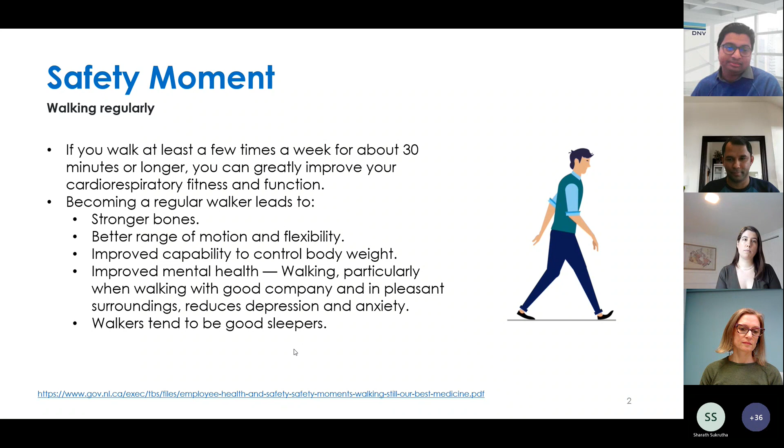Now, the Young Professional Committee is a brand new committee established late last year with a focus to bring together all the young professionals of our community in an organized forum. By young professionals, we mean those like many of us who have less than 10 years of experience. Our vision is simple: building the next generation of geotechnical leaders. Based on the vision, our mission is supported by 5 pillars: network, knowledge, development, collaboration, and impact.

The committee will provide a network for our peers and veterans, create avenues for building geotechnical knowledge, provide access to both personal and professional development, create opportunities through collaboration with industry, academia, government, and other young professional groups outside CGS, and create an impact by articulating a vision for the future within the changing industry landscape.

As you can see, we have a diverse leadership team representing young professionals from industry and academia, including both professors and students. 77% are from industry and 23% from university, both men and women, with 55% women. And almost all provinces in Canada: right now we have representatives from 8 out of the 10 provinces.

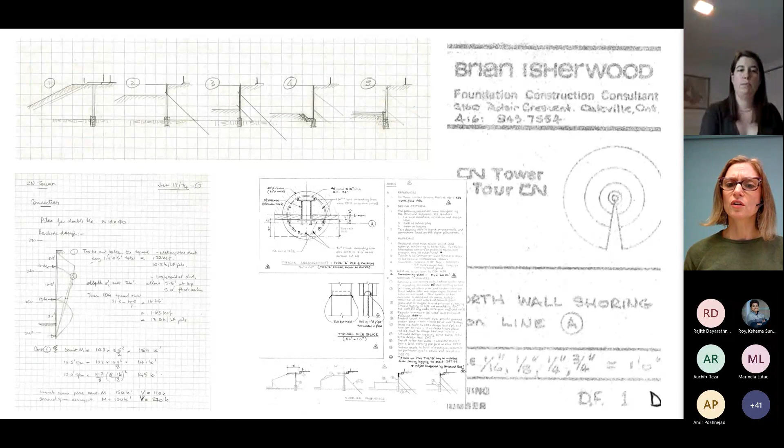Brian was very knowledgeable and an experienced engineer, and worked closely with contractors. You can see the care he would take to think through the process of the work, and in the middle there you can see the final product: detailed notes and details of how the pile and the caisson were going to be constructed.

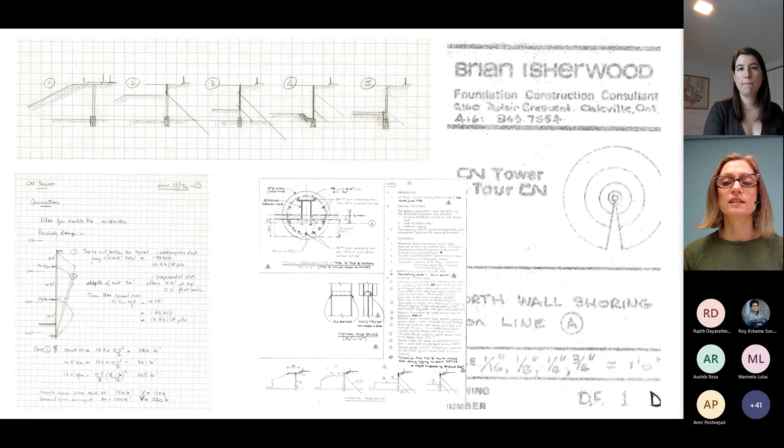So I think this gives us a good idea of some larger concepts that we're going to touch on as we go through the rest of the presentation today.

I wanted to give a little context on the different types of earth retention systems. The Canadian Foundation Engineering Manual has one chapter for rigid earth retention systems, like the gravity wall and bridge abutment wall examples on the left, and another chapter focused on flexible earth retention systems, like cantilever and tieback wall examples on the right. The difference, in simple terms, is that rigid systems move all in one, versus flexible systems deform as soil and water pressures are added to them.

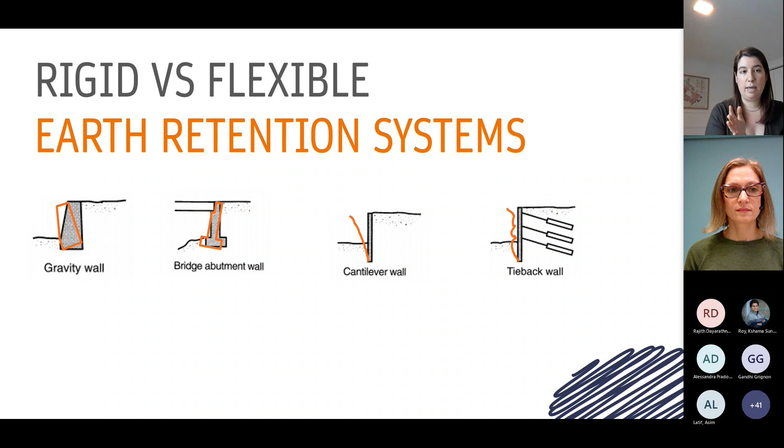At Isherwood, we specialize typically in temporary earth retention structures, which tend to be flexible systems, so that's going to be the focus of today's presentation. There's definitely lots that carries between the two systems, but we want to keep our focus a bit narrow so we can give you some good things to pull away and good understanding on one side, though you can definitely apply a lot of this to both types of retaining systems.

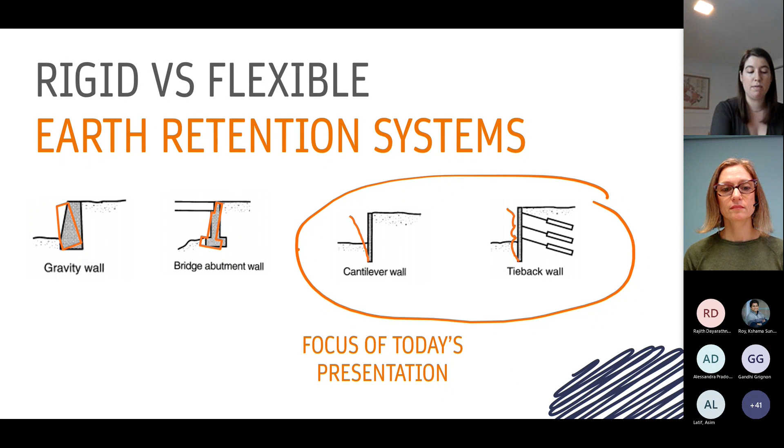So to start with, we'll just talk about why we really are doing this. Why do we need soil retaining structures? So this is just a little video.

I don't know if you're going to get the sound or not on your end. No sound, Erika? That's fine. Yeah, there was no sound. Okay.

So they said that if a 6-foot deep trench collapses, that could be 10 tons of soil. So even for something many of us might think is a fairly shallow excavation, like 6 foot deep, about the height of a tall person, it can put 10 tons of lateral pressure on you. So that's why, even for smaller excavations, retaining the sides of them is very important.

And then we have another video from one of our sites out in Vancouver, close to the coast, and water pressure is another big driver. I'm guessing you can't hear the sound here either, but you can see this is a tieback anchor, a soil anchor being drilled through a shoring wall, through a retaining wall.

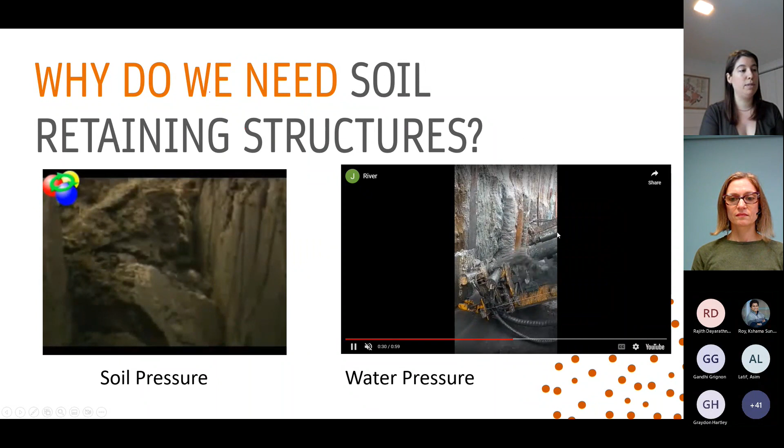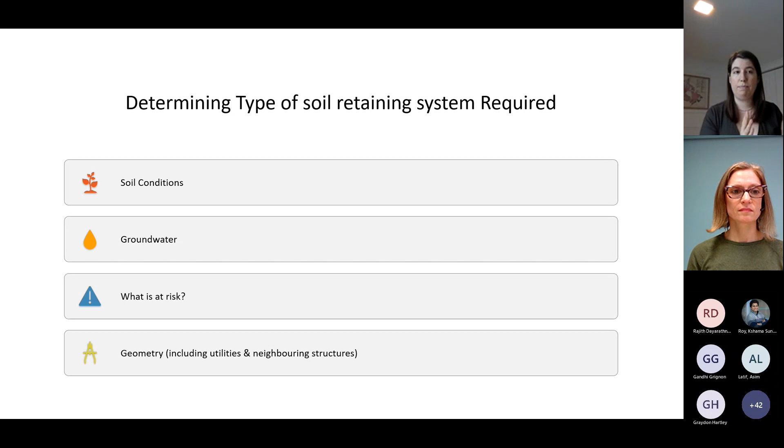So I mentioned soil conditions and groundwater are two of the things we're considering when designing a retaining wall system. You also should be thinking about what's at risk, which I have a slide next to show, and also the geometry, like where are the utilities, where are the neighboring structures, how deep of an excavation you need to build, or how deep of an opening you need.

So you definitely need to consider the risk when you're designing the retaining wall systems.

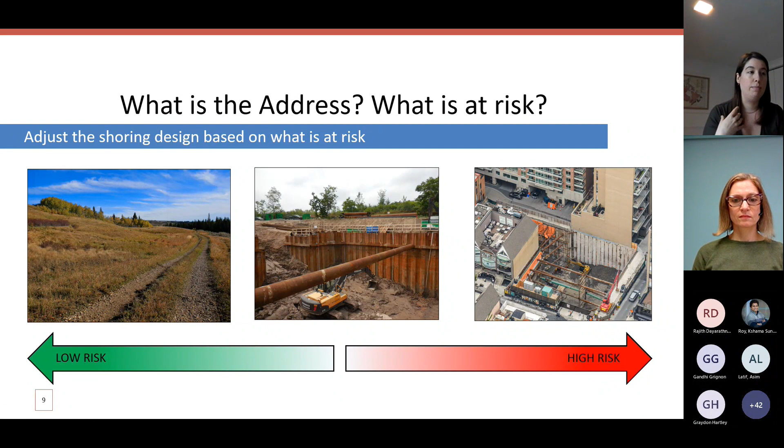I'll jump in here to give an overview of the typical elements of a temporary support of excavation design, starting with the inputs. I can't stress the importance of this enough—determining what parameters one's going to use, and all the information we have to be aware of in order to start the design. We'll touch on this in some future slides.

Step 2 will determine our lateral pressures. Here there's some judgment in terms of the distribution that we would use. I'll touch on that a little bit later.

Then, knowing the industry and what type of equipment and materials contractors are likely to use, we'll make some judgment about what pile size to select.

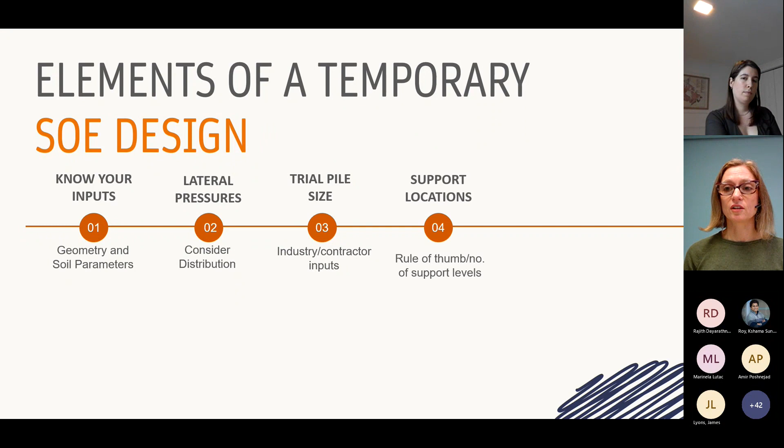Consider what level and how many rows of supports we're going to require and where to place those. We'll develop a simple model to determine things like pile moments that we'll use to design the pile for strength.

Then we'll consider the capacity of supports that we would need—again revisiting how we're going to distribute the loads, and where we can develop capacity, depending on different factors like soil conditions and which layers are stronger and better to develop an anchorage in.

Once we've determined, say, that we're using preloaded tiebacks, we've now introduced some vertical loads into the system, and we have to revisit the pile size and consider the axial forces combined with the bending moment. So we would do that refinement.

Now we're going to check our toe and ensure that we have sufficient penetration to get the reaction force that we require at the base of the system.

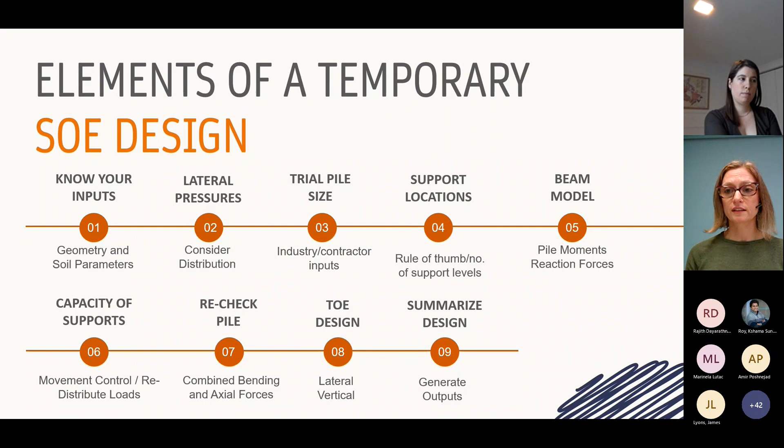And then finally, we'll summarize our design that we're going to take forward and incorporate into the drawings that express the design and are used on site to build the system.

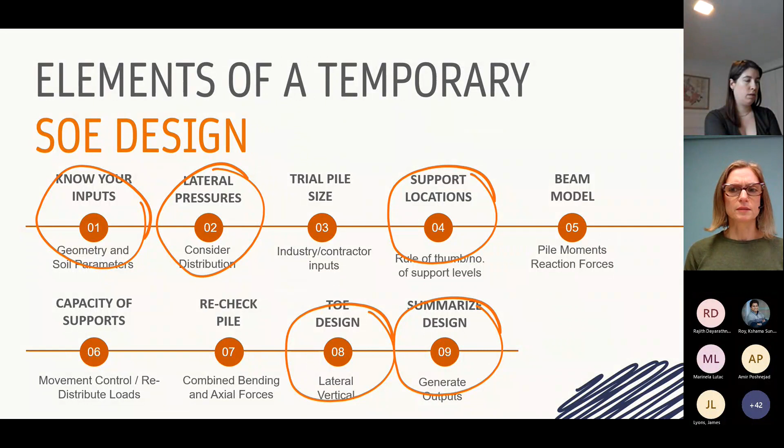So today we're going to focus on the 5 circled areas, as we won't really have time to get into the details of everything.

Okay, before we get into the design steps of how to approach a problem, we're just going to go through some examples of the type of systems that we tend to design, so you can get a feel for the wide range you might be looking at, the different applications, and that sort of thing.

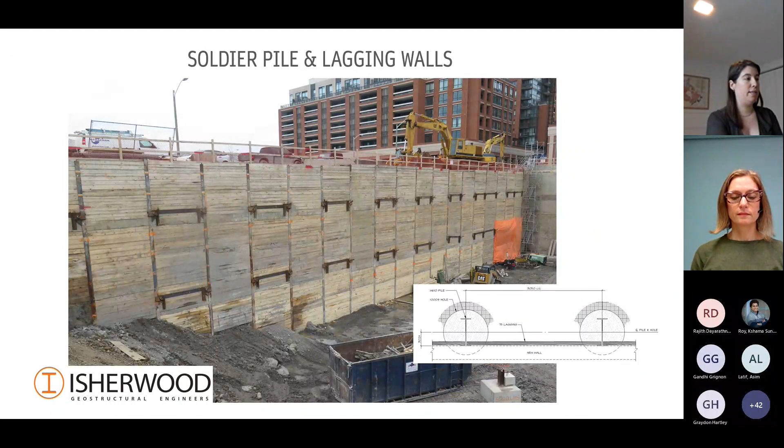So this is a soldier pile and lagging wall, which is drilled piles or driven piles with timber lagging in between the bays to support the soil. In this case, it's supported by tieback anchors, which you can see the heads of on the wall, extending into the soil behind the wall.

Here's another example, another soldier pile and lagging example, except it's 8 levels underground. This is the Shangri-La Hotel, I believe, in downtown Toronto. Once we hit the bedrock in Toronto, we just exposed the bedrock instead of lagging all the way down, because the rock is fairly self-supporting.

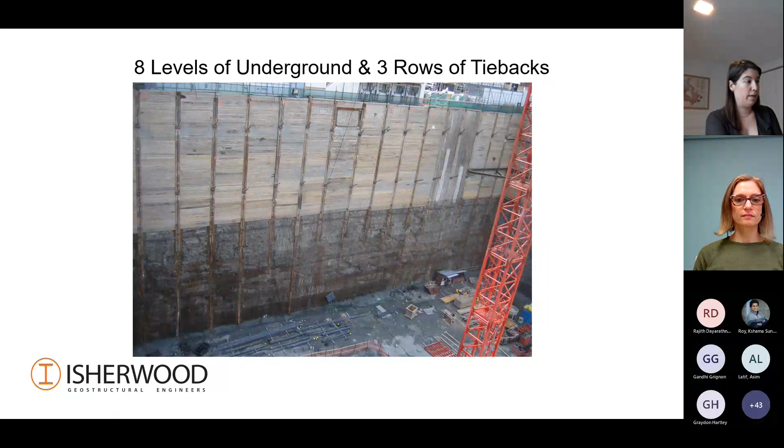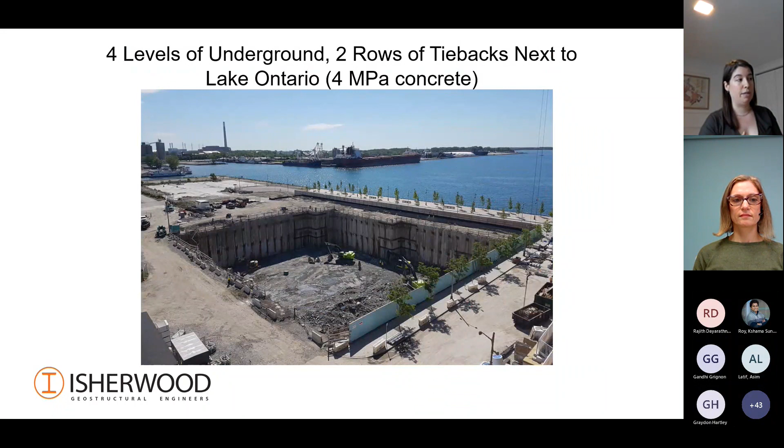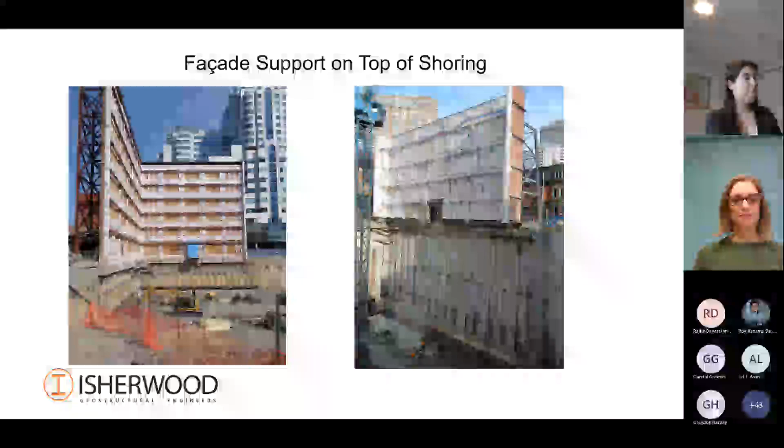Shoring is also frequently used to support—at least in Toronto—historical buildings where they need to keep the facades. We use it to support the facade system as well. So this is an example: you can see soldier pile lagging shoring below one, and a caisson wall shoring below the other example on the right, and then the historical facade is held up in the air, sitting on the piles.

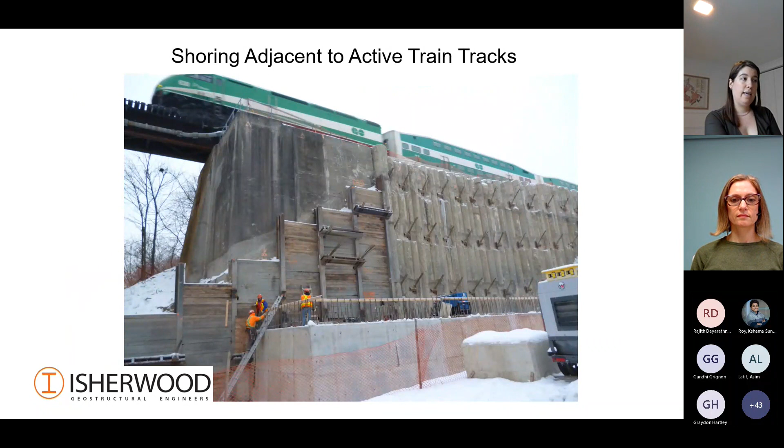And another example with soldier pile and lagging and secant wall shoring next to active train tracks.

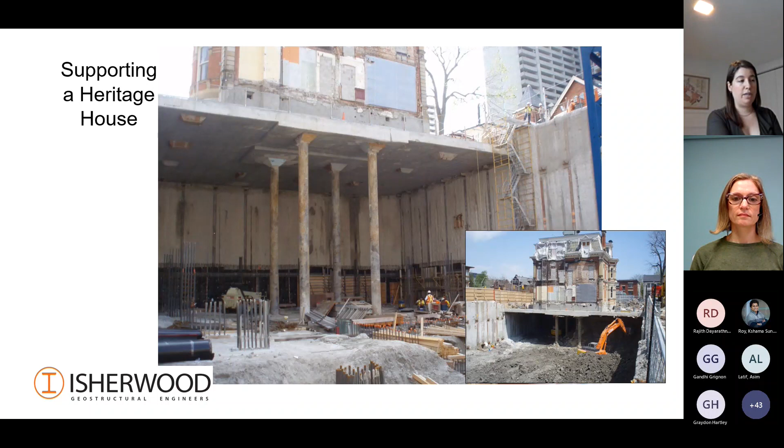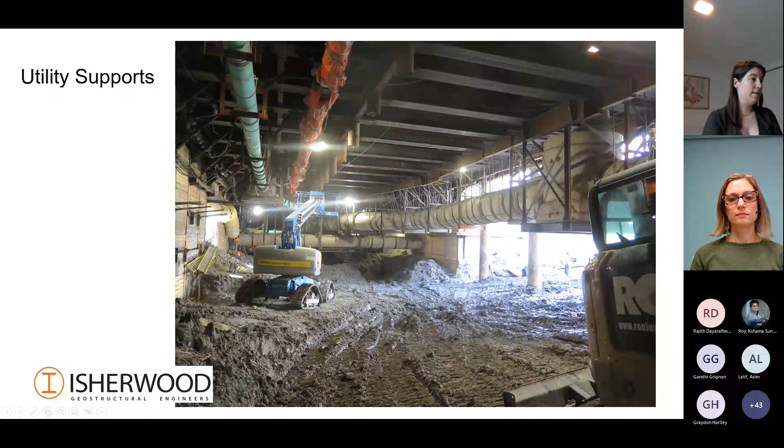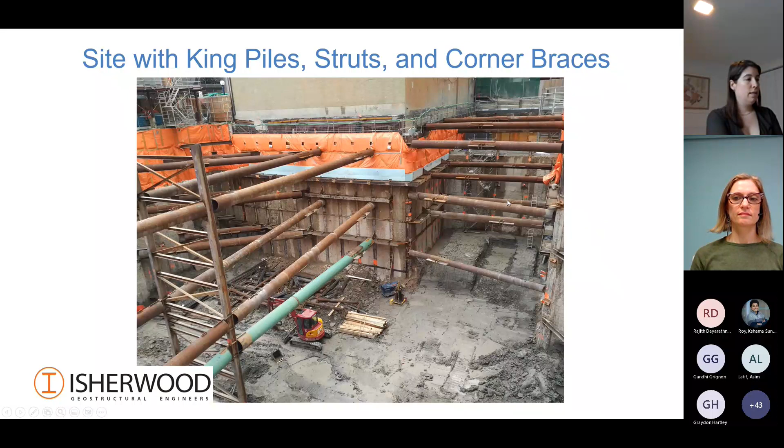And Carol, back to you.

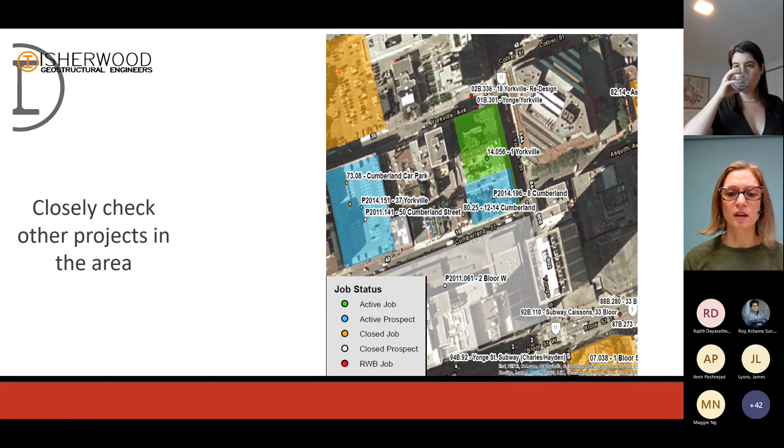Thanks, Erika. Here you can see, so at Isherwood, we use a database system to keep our archive of project data. Here we're showing the active job that we're working on is in green, and we have some neighboring jobs where we've already done work.

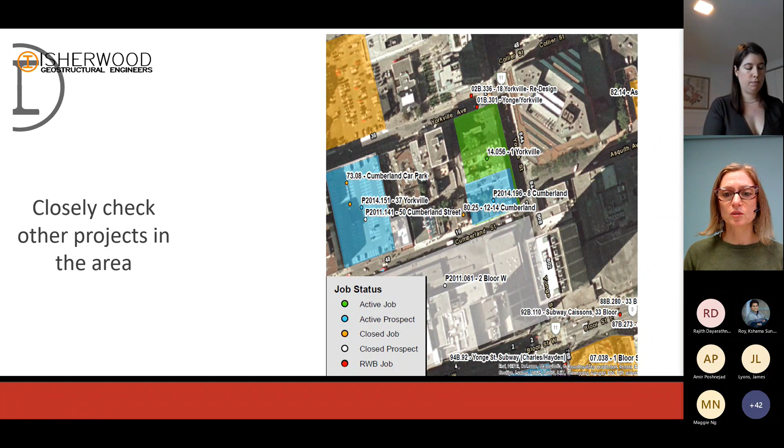So drawing on our experience and our knowledge of the local geology is very important. This gives you a little cartoon of the process that we go through. At each of those sites, we keep the geotechnical reports so that we have access to information about the soil types. We also, having done tieback testing on those sites and having done monitoring on those sites, draw on all of that information to inform our design in that local area.

Here's an example of a project where we received just a geotech report with only 2 boreholes, which isn't enough data. So it's important as an advocate for our profession to speak up to our clients and educate them about the importance of geotechnical data, and let them know what we would recommend and advise that they provide in order for us to create a more economical design, which not only will save the client money in the construction of the work, but also can help our designs to be more sustainable, which we're now acutely aware is more important than ever.

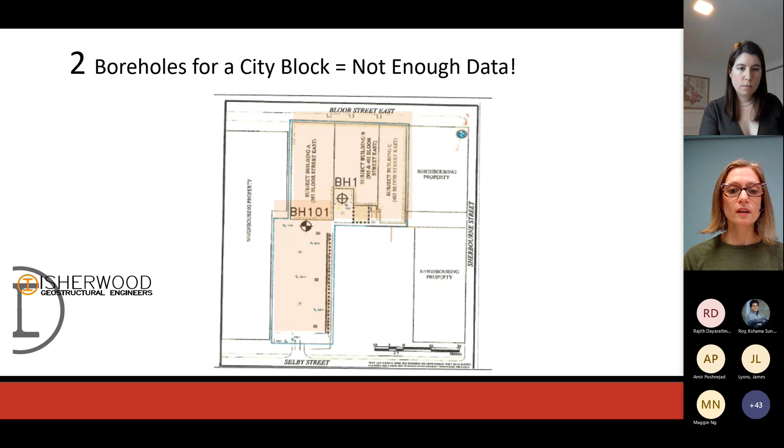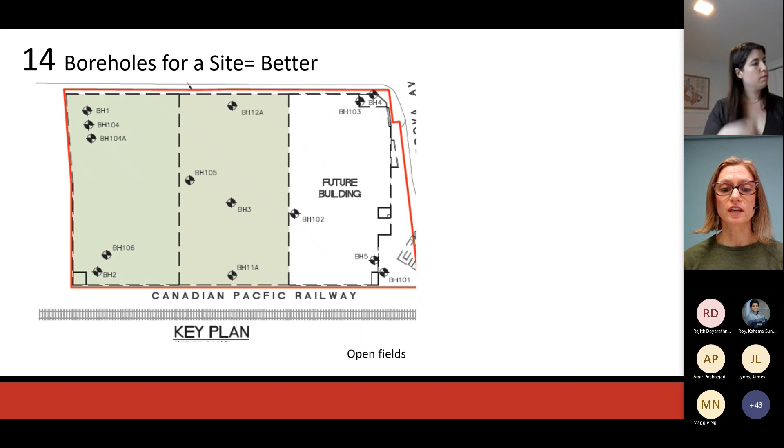In the next example, you'll see a project with a much better, much better collection of geotechnical data that we can use to inform our design.

It's important to keep in mind that the soil is a very key part of the system that we're designing. The steel and the timber and the concrete are all very important, and we design that, but we're also working with the soil. So understanding what we're working with is really important.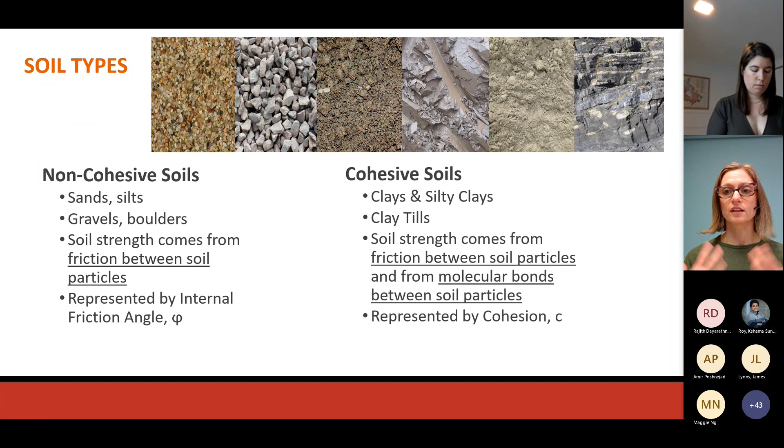All of you will have a good base of knowledge from your academic training. Then as you apply this to your work, considering how it influences your work is the next stage of development of your design ability.

Here we want to give you an idea of the importance of developing a feel for what you're working with. So if you just imagine a cubic meter of soil, which is about the length of your arm in 3 directions, a big cube that size, that's 20 kilonewtons of weight.

I don't know if we have much interactivity in this interface that we're using, but if anybody wants to chime in as to another material that is similar in weight to soil, I'll just pause a millisecond here and see if anybody wants to contribute.

I think they are not allowed to. Oh, they're not able to. Yeah, people can't turn their speakers on. Carol, it's only the chat option available for them. No worries, okay, I'll pretend to be answering my own question. Oh, look at that, we have one answer.

Thanks, Chris. Concrete, yes. Concrete is 24 kilonewtons per cubic meter. So we all know concrete is very heavy, but I don't know that people always realize how heavy soil is, even those of us who are academically trained.

So that video that Erika showed us before about the soil collapsing, that is really a key thing to be aware of as designers, the responsibility that we have for the safety and performance of our systems.

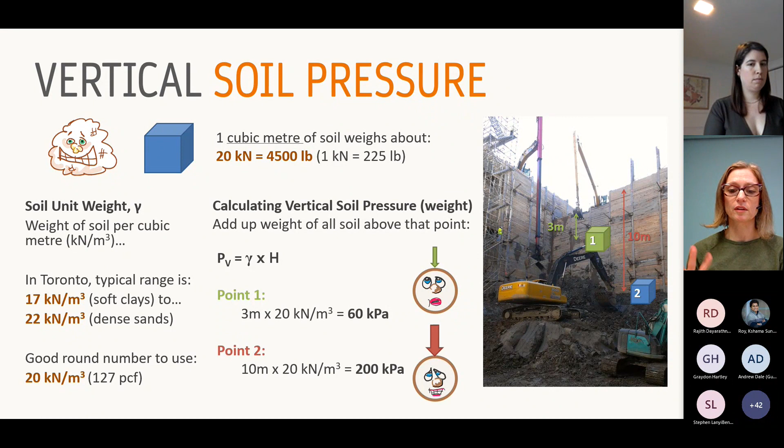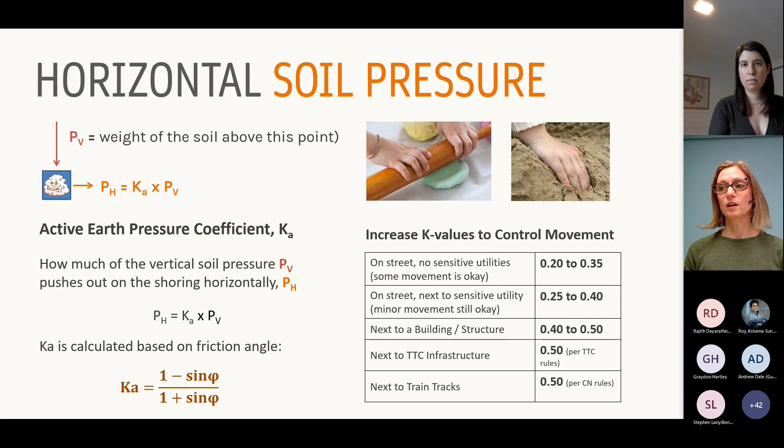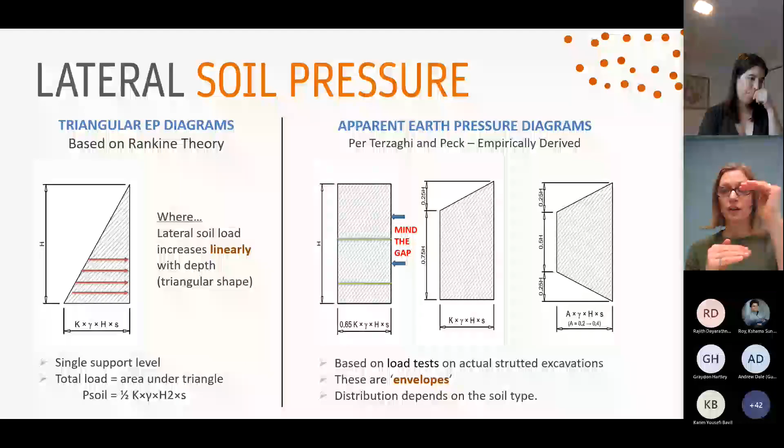So these diagrams were developed based on empirical data, and they are actually envelopes that were drawn around actual data points that were gathered on sites based on strain gauge data from struts. And the envelopes were drawn so that a designer could take the apparent earth pressure diagram, the tributary contribution for that particular support, and have a force within which that strut load would fall. And so it's a very safe approach that's based on actual real world experience. And it also shows us how, based on the different soil types, the distribution can vary.

So this rectangular pressure distribution is actually more reflective of what we often see on sites, particularly if we're preloading the upper supports, that we'll see more load distributed towards the top of the excavation and not such an increase in pressure towards the base. And that's something we can control through preloading and experience.

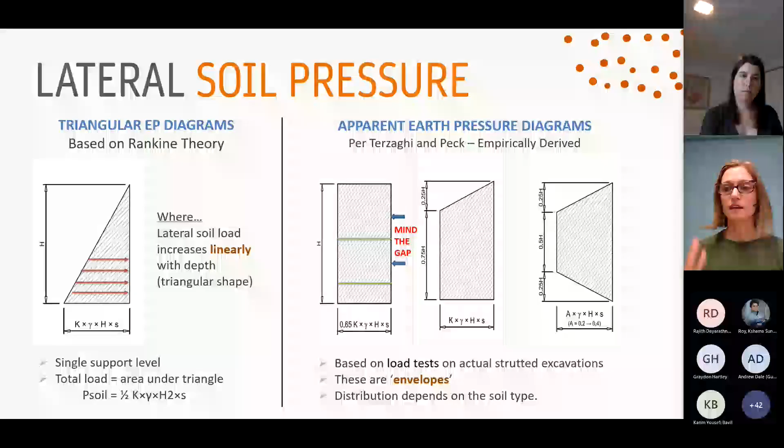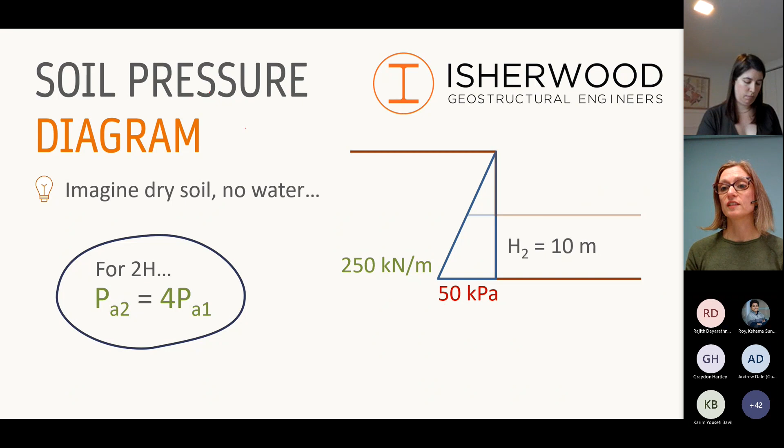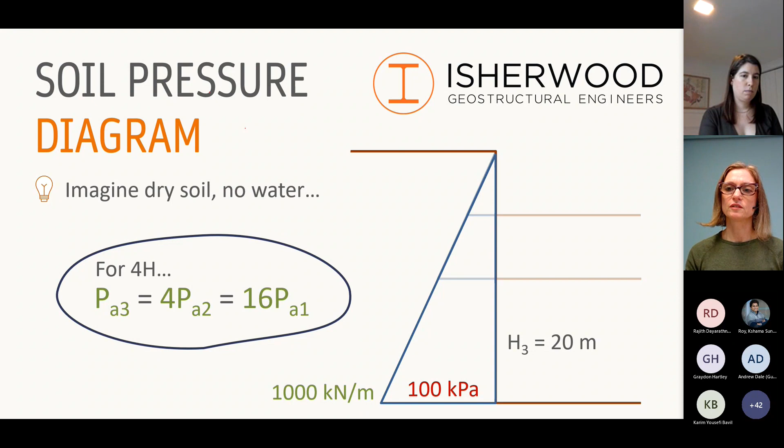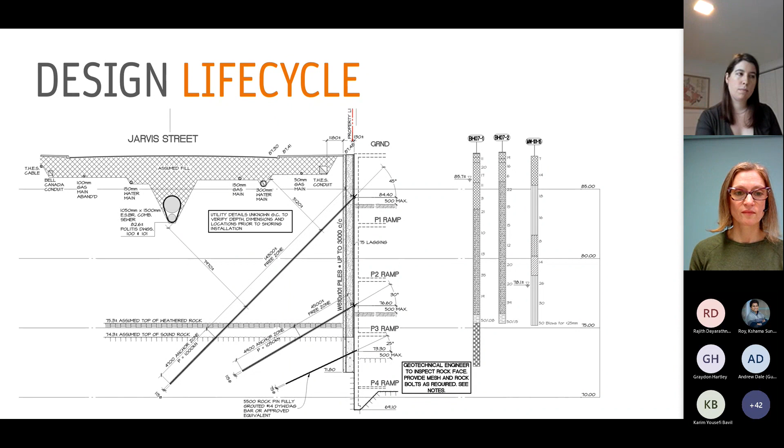Erika, I think you were going to speak to the monitoring here. Yes. So you can see here from this example, this is a simple beam analysis, like an elastic beam analysis model. That's just modeling triangular earth pressure, which is, as Carol was talking about, one method of modeling the soil pressure. And in this example, we calculate the moment, and you can see we have some sort of deflection output here.

And we have the deflection drawn on here, just kind of superimposed to scale so that you can see how much movement we're expecting. And this little part in the middle is just a reminder to keep a sense of the scale. So you can see the predictions here are essentially 5 or 6 millimeters of movement, which is half of a centimeter of movement.

So we draw this very exaggerated view just for us, for design purposes, to get a feel for where the maximum movement will be, but this scale is grossly exaggerated just to keep in mind where we'll see that movement. It's actually very little movement that we're expecting.

And this is the same project, and it's the actual movement that we saw on the site. And this is an inclinometer plot, so this is a monitoring instrument that's used to calculate the amount of lateral deformation. So you can see here, this is how much movement we actually saw. And it's also grossly exaggerated. It's about 7 millimeters of movement.

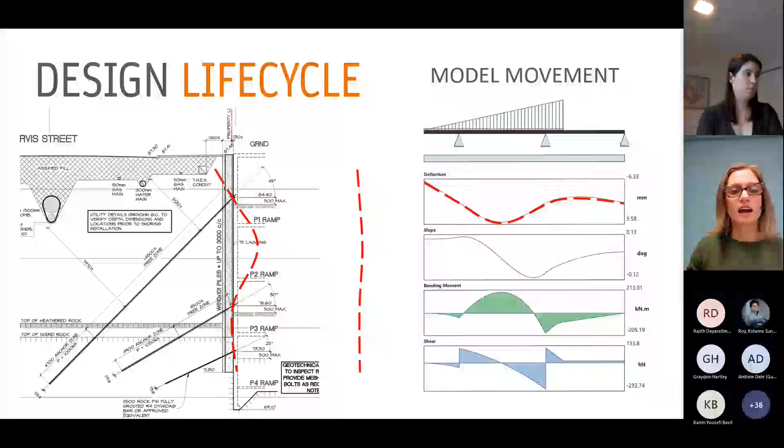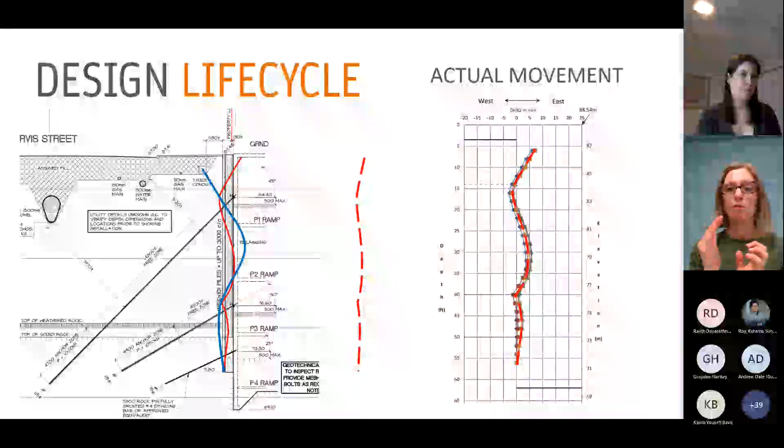Just again to emphasize that these movements are really exaggerated, and I'd also point out the way in which you can see how unsophisticated these models can be: if you look at the blue and you see how that is deflecting back into the soil at the top of the pile, in reality there's resistance there from the soil itself, and the model doesn't account for that. So looking at real monitoring and having that real world experience of what the deflected shape will actually look like helps to inform your design.

And that's an important thing to pay attention to whenever you can, to try to get that feedback. When you do your calculation, that doesn't give you the whole answer. You still need to look for the data from the world around you.

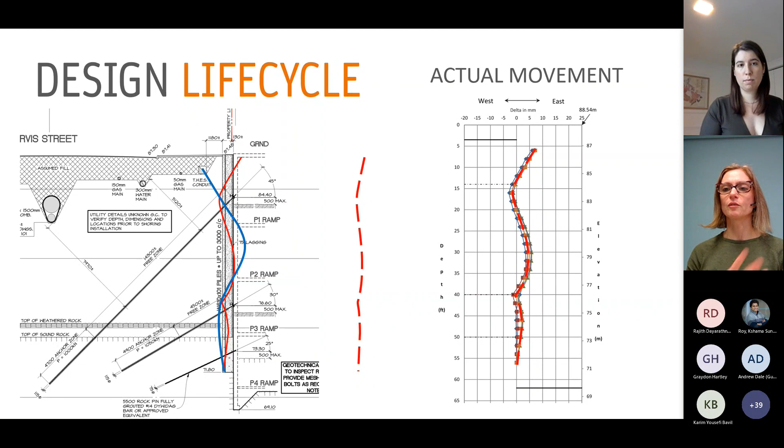This is another slide that just shows, again, following really basic elastic beam analysis principles, where we apply the same load to both of these models, but we model the support reactions in different ways. So in this first model, we modeled the pile toe, where the pile is embedded into the soil, just as a pin support. So we're saying the toe won't move at all. And we're modeling the tieback support also as a pin support.

If you want to stick with the simple model but get a little bit more complex, you can calculate the elastic rigidity of the soil anchor, of the steel in it, think about how much it will deform, and you can come up with springs that represent the soil parameters as well and model the toe as springs. You can see here in the two different models, again, very simple elastic analysis models, you're seeing two very different deflection predictions. The bending moment predictions are not that far off, maybe 10% off for the maximum, but the deflection predictions are quite different.

Yeah, and we use these types of calculations predominantly for determination of the moment so that we can size the pile, and we rely less on it as a deflection prediction. This is a particularly good tool for that.

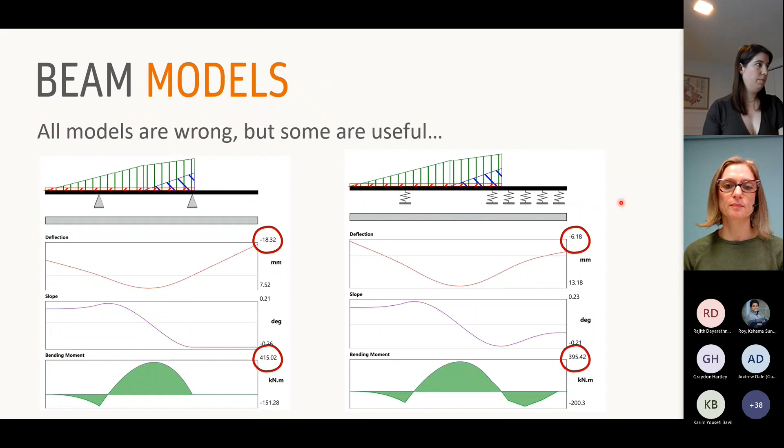So the first thing you need to think about before you start the design is what questions are not yet answered, like what information don't you know? So we have some question marks here just as a clue. I know this isn't a super interactive thing, so I'll just give away the answers. But if you want to think about where we're missing information, then you can do that.

So for example, this neighboring building, we're just assuming an underside of footing here. We don't really know what this neighboring building looks like. Maybe it has no basement, maybe it does have a basement, maybe it's a condo building and it has 5 underground parking levels and we'll be way down here and we'll need to avoid hitting it with any tiebacks.

You can see we have a question mark by this borehole. You might notice that it's not very deep and not giving you the full soil profile all the way down to your base. Utility details unknown, so we don't have utility information in here right now. We need to find that out.

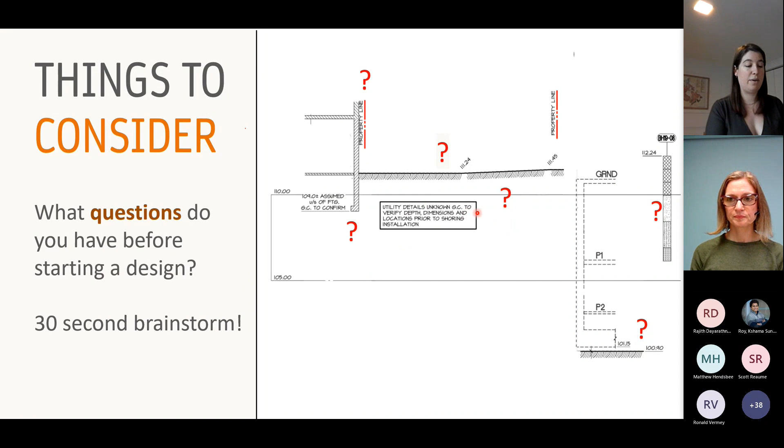And this is from a tutorial that we did in our office a while ago, but these were questions that came up based on a similar 10-minute design brainstorming job. So we aren't going to read through all of this. I'm guessing you can't really read this based on the scale, but there's lots of questions that you need to think about before you even jump into the design. So the group in this tutorial came up with over 150 questions that really needed to be answered.

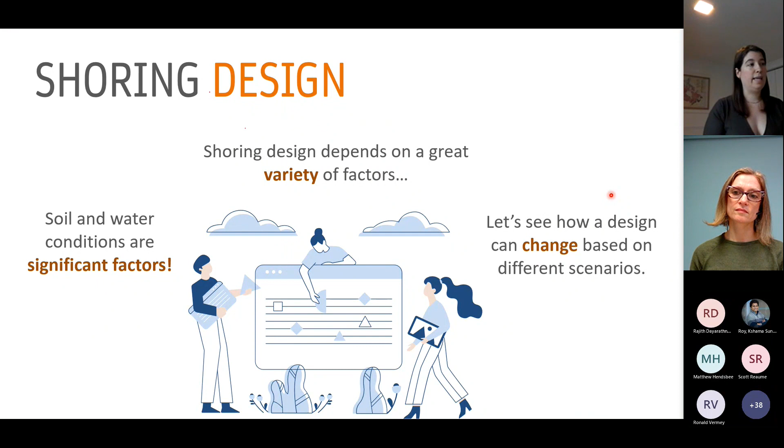And so we're going to go through some examples of how a shoring design can change based on a variety of factors. Carol, did you want to go through that? Certainly. Yeah, you can jump in whenever you like, Erika.

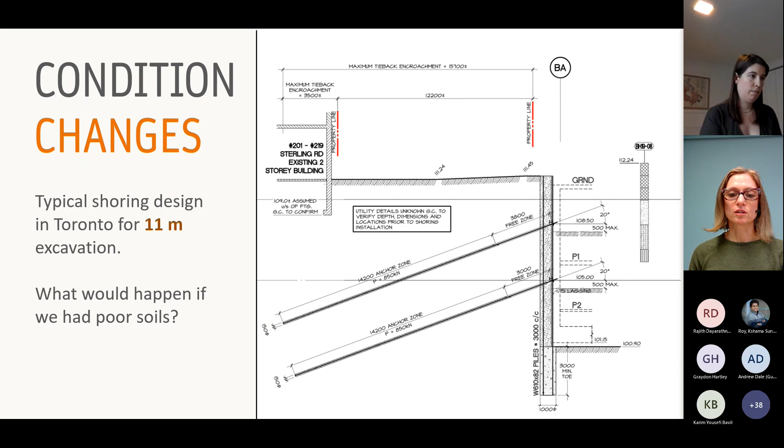However, upon getting further information, this is borehole 09 there. That's actually what we learned the soil conditions were, and it says WH there, which is not something I'd encountered in my career previously, which is weight of hammer. So they're dropping the hammer and it's just falling through without needing to be tapped. So that's really soft material there. And then you can see it improves to an N value of 11 further down.

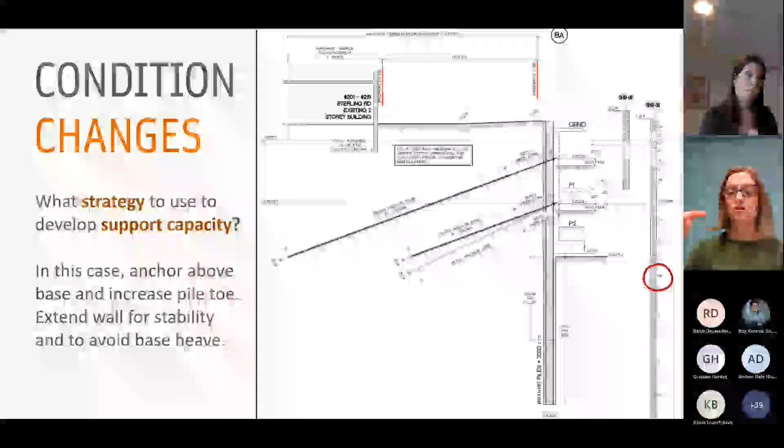So our design changed dramatically based on this information. You can see the toe got a lot longer. The caisson wall was extended to 6.5 meters below base of excavation. And our tieback design was revised so that the tiebacks are all anchored above the base of the excavation, because that's about the line where the soil strength drops off quite remarkably. So again, these real world factors can really impact your design.

So now here's another example. We've got a proposed building. That's what the dashed lines indicate. And we've got our borehole data. Here we have competent material throughout and below base of the excavation. We have excellent material. And, again, we might say, with this distribution, we will have 2 tieback supports and our pile toe as shown.

And then we're going to add more information. Well, if we hadn't gone to the site and done an investigation and checked the survey, we might not realize that there's actually an underground parking garage next door. So now how does that impact? Now we can't put the upper tieback where we planned, and our design might look a little more like this.

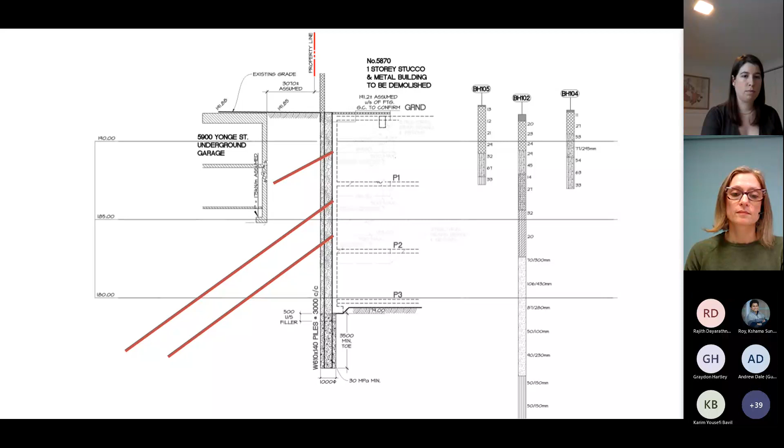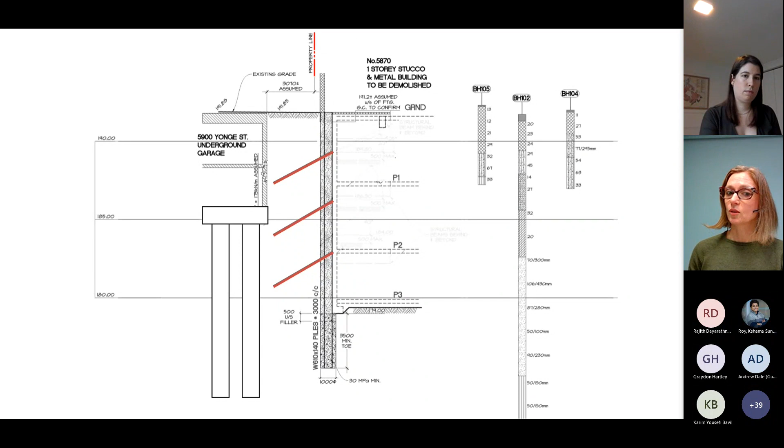What if the neighboring building was actually sitting on caissons and was founded at a greater depth? In this case, borehole 102 would not apply, because it's unlikely that this building would be founded on caissons in such good soil. But say the soil was weaker and we had caissons, again, how's this going to impact our design now? Now we don't have room to put longer tiebacks. Now it's going to look something like this, and our toe design would also change considerably.

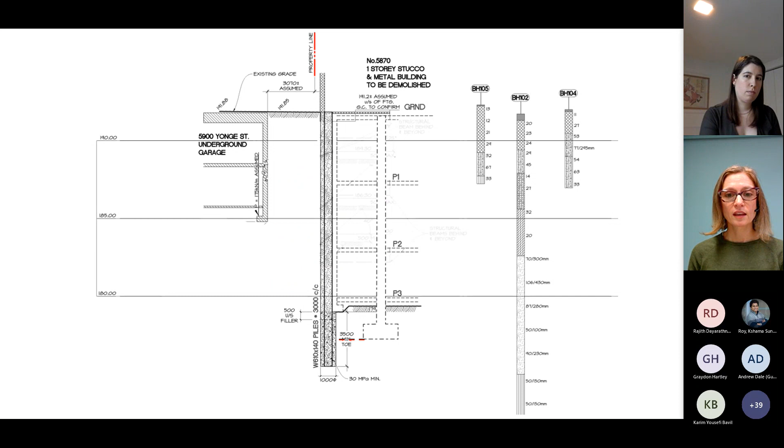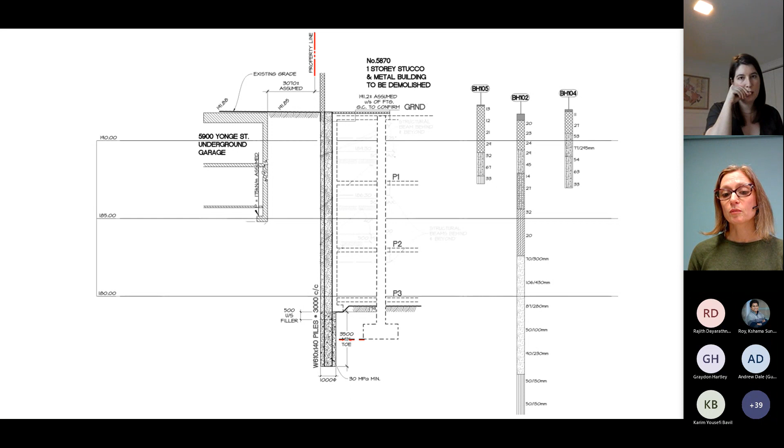So here we're showing how the proposed structure, the internal footings, can affect our design. Now, if they're planning to put a deeper internal footing close to the shoring, it's going to impact our toe design. They're going to be excavating in front of our pile toe, so we're going to have to drop our pile toe. So again, another factor that affects our design. So you see there, the toe's been dropped. We've got some tiebacks that are diving under the adjacent existing building, and we can only put in a short deflection control anchor at the top.

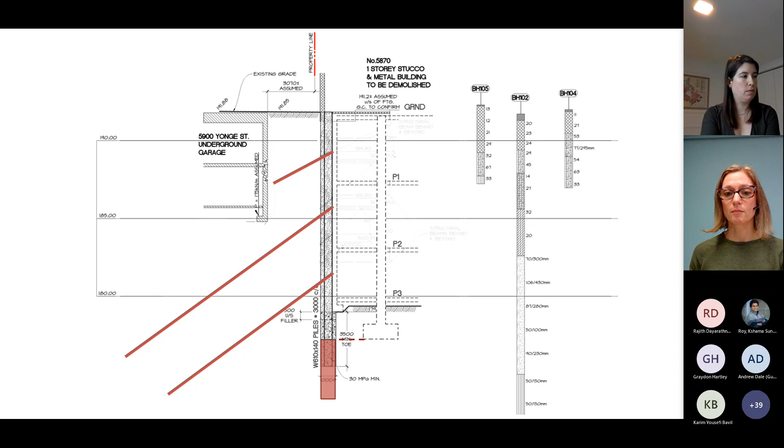And now what if on this same project we got that stinky borehole with the weight of hammer soft material? Now what? So that changes our design considerably.

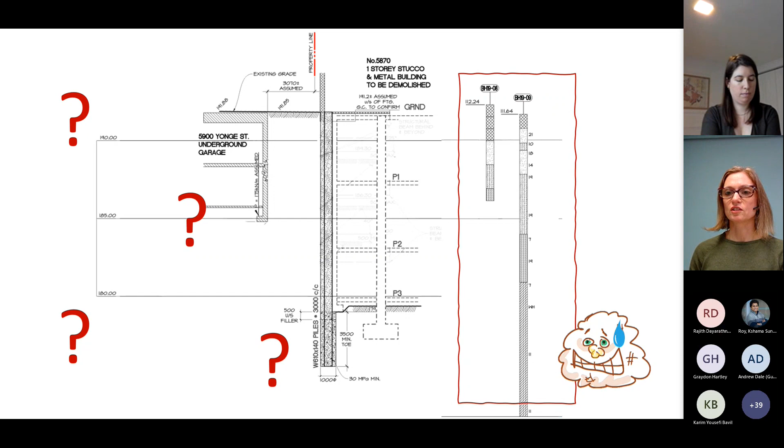Okay, so the last part of this presentation is going through an interactive example. So this is where you can kind of think about how you would approach something. I'll go through it fairly quickly since we don't have a lot of time left, but that way we'll leave some room for questions at the end. Actually, I'm just going to flip through this and show you the drawing to start with, instead of walking through the example.

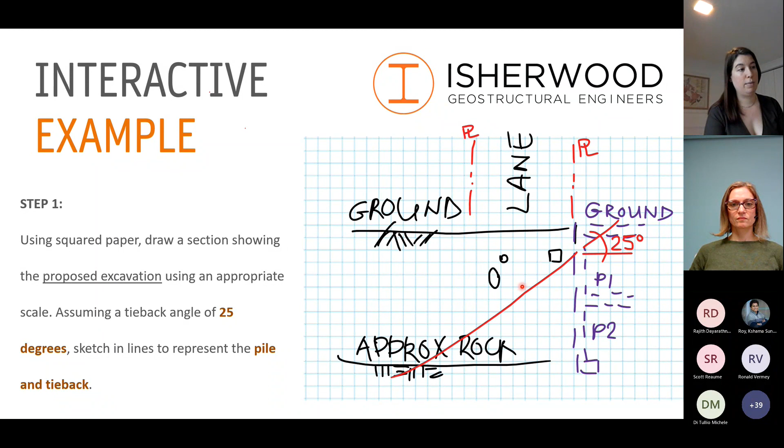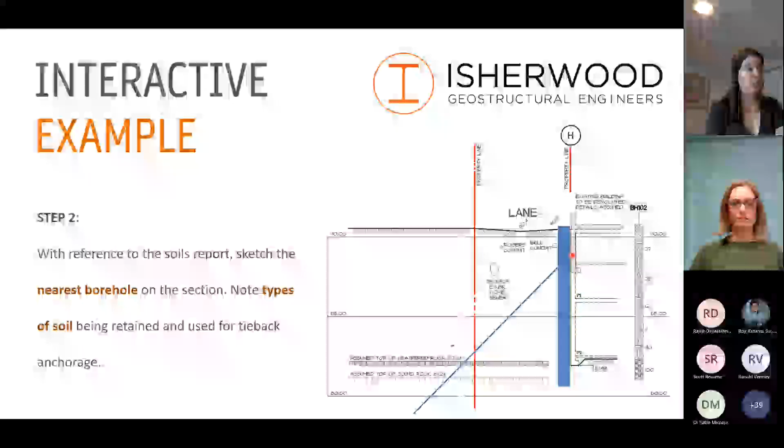So we've sketched this up a little bit cleaner. We've pulled the geotechnical information, and we can see that we have N values on the side of it, and this symbol here is for shale bedrock. So we're hitting some rock basically right at the base of excavation. And based on that, we decide to switch from a 25-degree tieback to a 45-degree tieback so that we can anchor in this rock instead of the soil above the base that isn't the greatest. So we've drawn our pile in here and then a tieback schematically.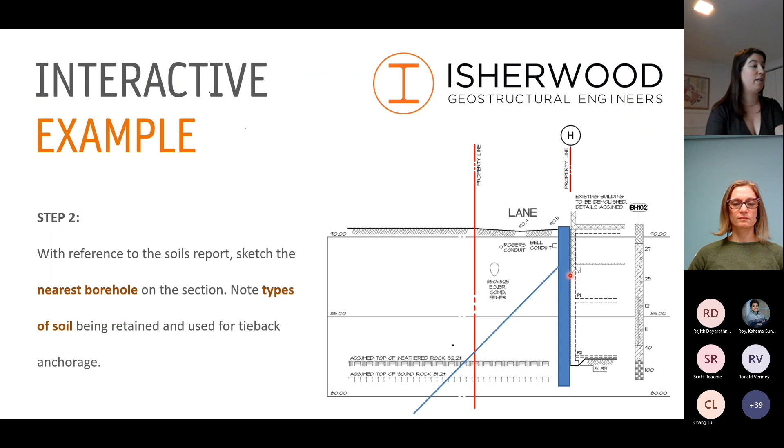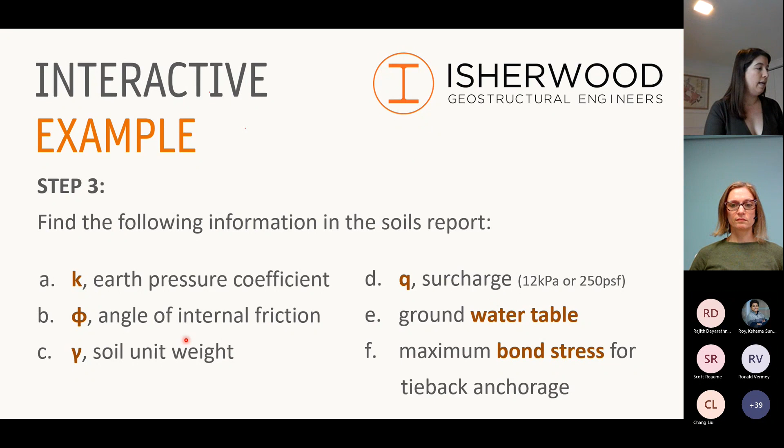The next step is to look through the soils report and find some good design parameters that you can use. So there's earth pressure coefficients, the phi value, basically following the formulas that Carol went through earlier in the presentation. Looking at whether there's any groundwater, like water pressure that we have to retain. What surcharge? There's a laneway, so there's probably going to be some traffic driving through there, and we should design for neighboring traffic like construction vehicles or just cars driving back and forth. And we should think about the maximum bond stress for the tieback anchor as well.

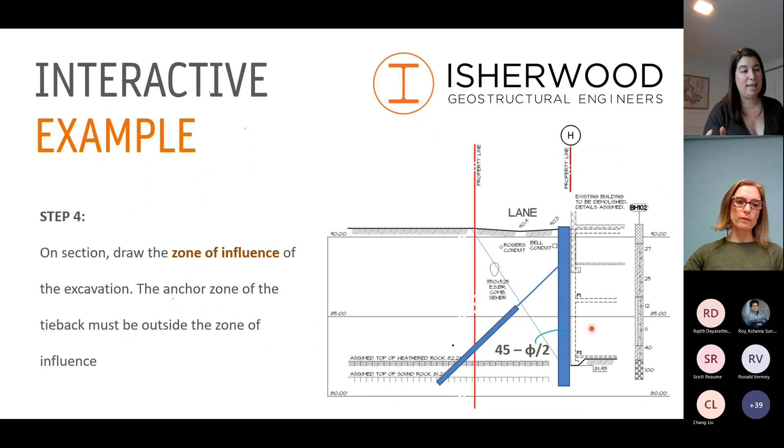So in this case, if we're going to do a rock anchor, we would draw the zone of influence. So I've drawn this here. This is the active wedge of the soil, based on an angle of 45 minus phi over 2, this angle here. And we want to make sure that we keep our anchor outside of that zone. We would look at the soil and rock information, and in this case, we decide it makes more sense to elongate the tieback and anchor it in rock because we aren't quite sure of the capacity of this soil. So we're well outside of the active zone, and we're going to just anchor into the bedrock.

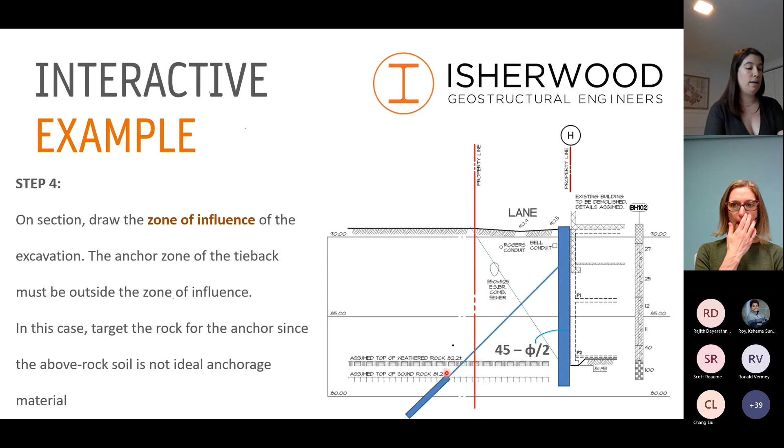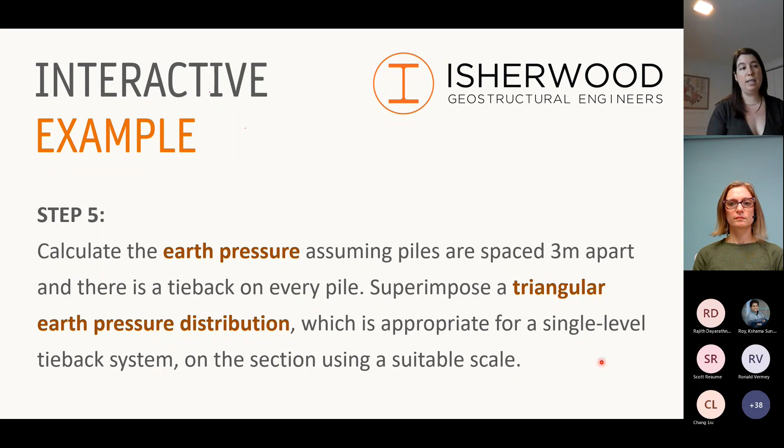The next step would be calculating the earth pressure, assuming the piles are spaced at 3 meters apart. Pile spacing is sometimes an iterative process of looking at different options. You might calculate it at 3 meters and realize the tieback loads are too high and won't work for a typical bar design or tieback strands you have available, so you might go back and reduce it to 2.4 meter spacing. There's a lot that goes into that, but in this sample case, we chose 3 meters.

You can superimpose, in this case I've just shown the soil pressure, the active soil pressure here, and the passive resistance here. This is a really simple approximation. We do have rock down here, so the passive resistance of rock doesn't really behave like soil. This is just a simplification, but it's meant to show you how you consider the resisting loads and the driving loads of the system.

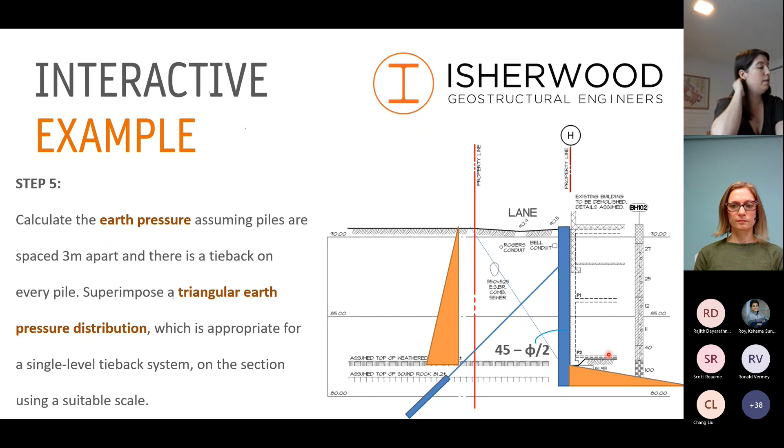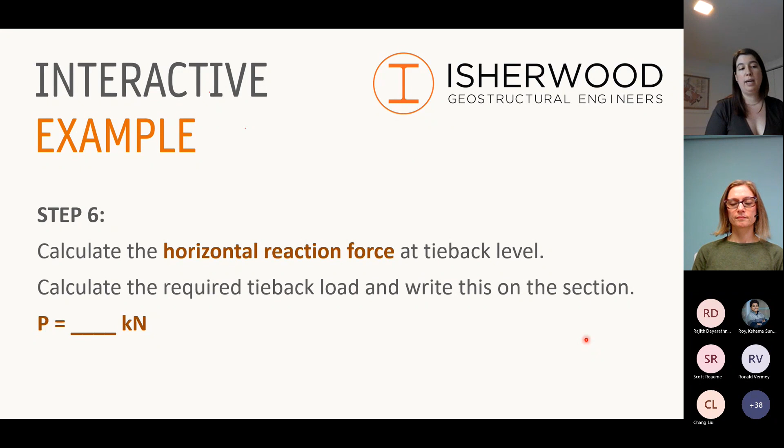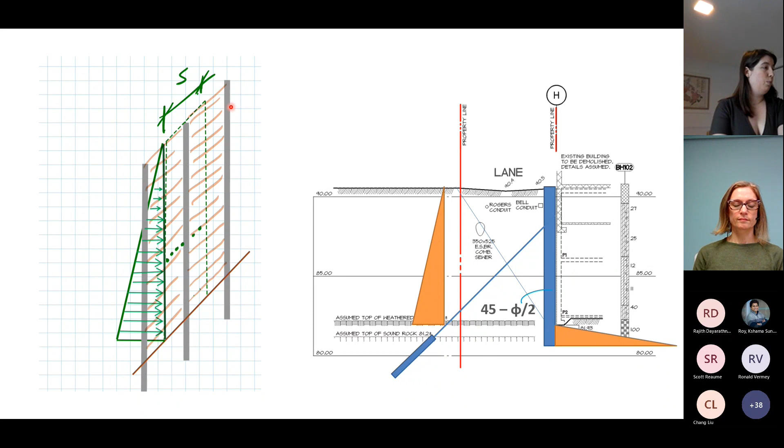You would calculate the horizontal reaction force at the tieback level. You can do this by hand simply, especially for a one-row design like this, where there's just one row of tiebacks, or you can put it into an elastic analysis program and calculate it. In this case, there's a little 3D sketch that Carol did to show where the piles would be and the lagging between them.

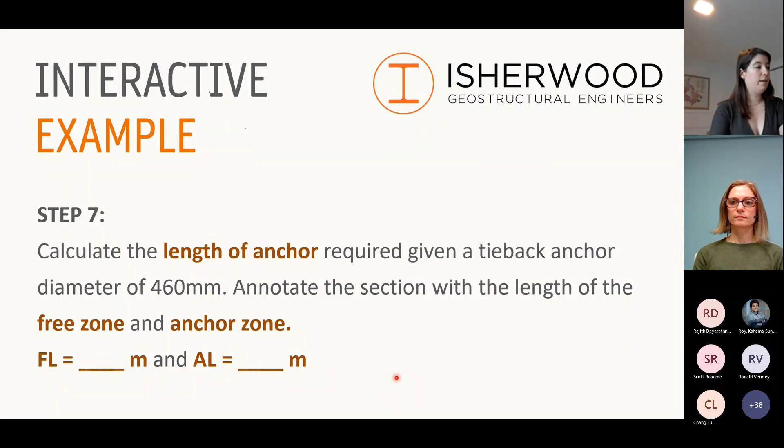And once you know the load in the tieback, you would calculate the length of the anchor based on the adhesion you can get in the rock and the load that's in the tieback. So these are just examples showing how you could simply calculate some things by hand.

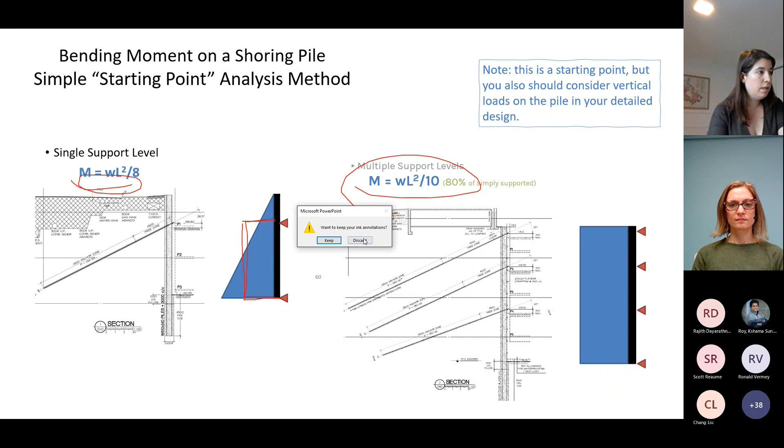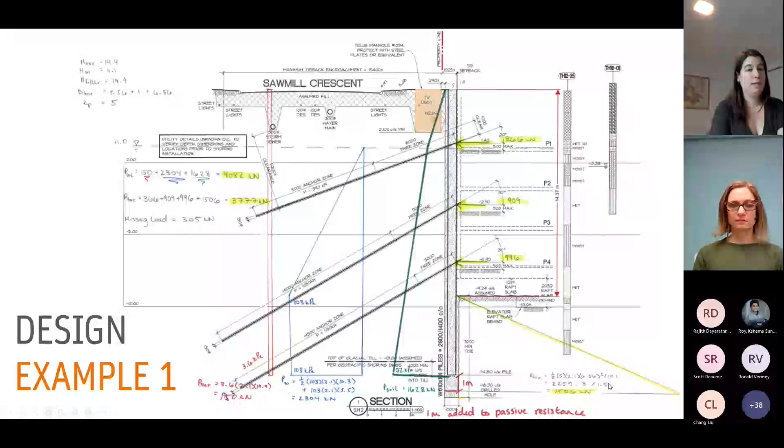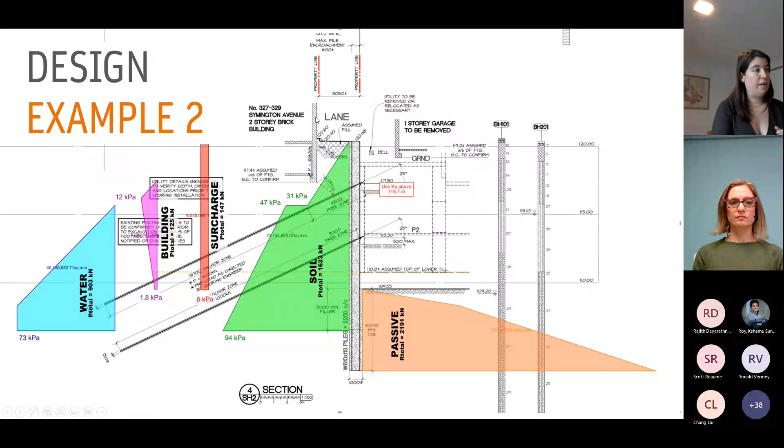This is another example where you can just see all of the pressures laid out, to give you an example of what a more complicated pressure distribution would look like. In this one, we use 2 different K values, one for above the influence of the neighboring building, and then we increase the K value to better control deflection once the neighboring building starts putting load onto our system.